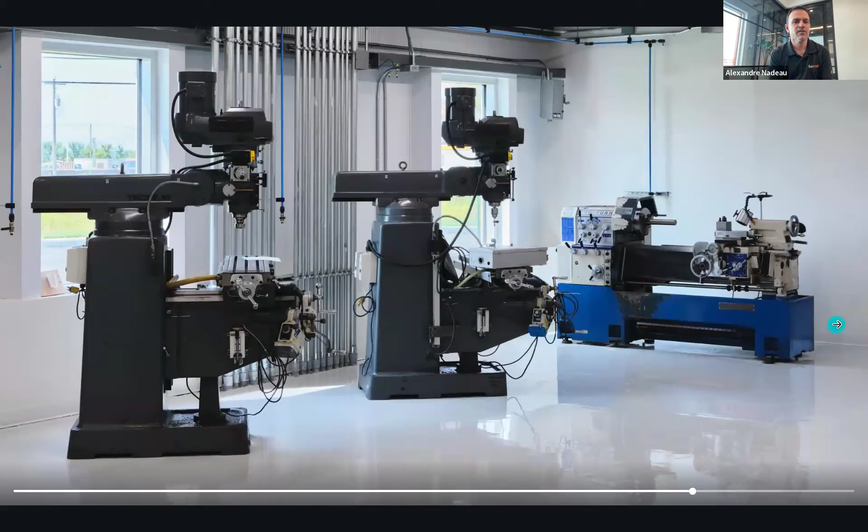So Tecnar is a funny company, guys. We have 4 business units under the single brand. Okay. Why do we have 4 business units? Because my father, who used to be a researcher at NRC, invented a way to weld semi-automatically pipe spool welds, open bevel butt welding for pipes. And that's 89. And we're still world leader in robotic welding of pipe spools.

But as time passed by, we were given opportunities to develop technology for other patents that had in common that they were all being invented at Boucherville's Institute of the NRC. So I think what we have in common is a highly diversified company with NRC Boucherville inventions. This is what we are. Why do we still have 4? Because I think we've really believed in all of them. When I took over management in 2016, we decided to keep them and reinvent them, redesign them, rebrand the company.

And the first 5 years was really establishing products that are industrial, not only meant or tuned for early adopters or innovators, but meant for the industry. So it's not a chronological image set, but we'll start from the left. As you see there, that's the Accuraspray. It's the 4th division. Of course, Luke knows this one very well. He basically pioneered the whole thing in the 90s and was with us for 20 more years.

The Accuraspray now is going to reach its 1,000th sensor in the industry. And now having diagnostics is not a curiosity, it's a must in the thermal spray industry. It is a true repository of the intellectual property that really matters, which is what's out of your gun. People are building their IP with what the Accuraspray measures. We're super proud to have coupled that to the cold spray industry with the CS.

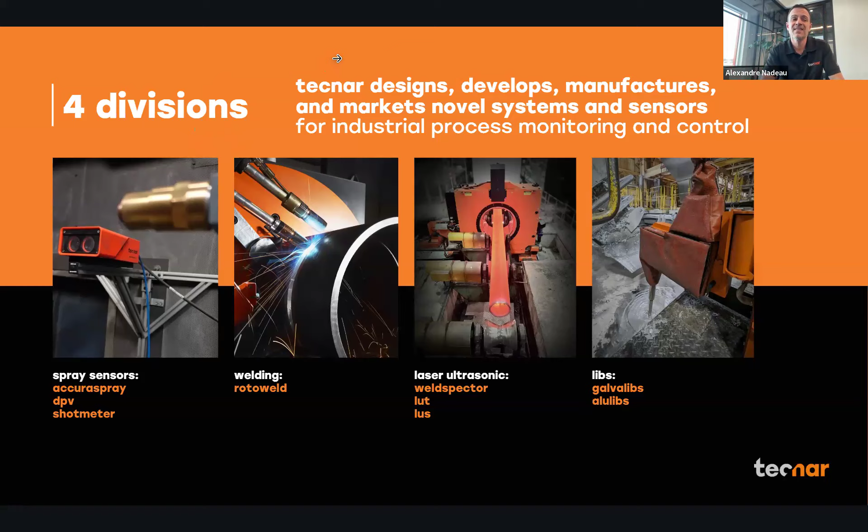Why do we show this one? It's because it's our main repeat business, in which we have a segment and a strategy to become #1, because we're basically more accurate, we're safer, and we're friendlier and more versatile for being installed in many different places of the plants, small diameters, very large diameters. So laser UT is quite an adventure, and there's actually a bright future for laser UT in the inspection of cold spray additive structures, and Luke will talk about that.

Then finally on the right, we also do chemistry by lasers, which is LIBS, laser-induced breakdown spectroscopy. We have not invented that; what NRC invented is a nice little trick that they've patented to apply LIBS to molten metal chemistry monitoring.

We now have about 50 systems in continuous galvanizing lines, and we're currently opening up the market to molten aluminum, namely the secondary market of ingots and casters, where using recycled material is key to be profitable, and having a continuous reading matters much more than just using physical samples every couple hours. So today's future for Tecnar, before I leave, is to use all these data that we've been providing.

Even the RotoWeld has a camera, and we use the data of our systems to replace expertise that's harder and harder to get. The RotoWeld already has that. It welds now all by itself. The Galvalibs on the far right will, by the end of this year, replace the galvanizing engineer by deciding itself what to put next, what ingot category to put next in the bath.

The LUT for seamless pipes is going to decide which plug is good or bad for doing the piercing, for example, and the Accuraspray should, by the end of this year, decide itself what is the right spray parameter based on an AI loop with lab results. So the goal for the future at Tecnar is to build value on our data, and cold spray is definitely a vibrant field in which we're looking to be present too.

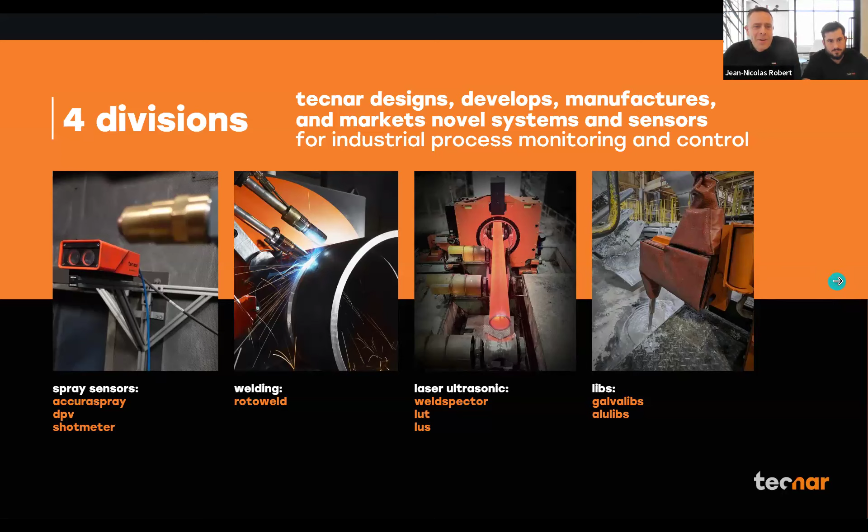Thank you very much. Awesome. Thanks, Alex. Yeah, you're kind of stealing my thunder there, but that's fine. We'll speak about that at the end of this presentation, but thanks. You're the boss after all.

So here's a deep dive. I just wanted to take a minute to, again, dive deeper into our spray sensor divisions. There are some products that you guys on this call already know. Just a couple of updates as far as our products are concerned. The cold spray meter that some of you know about or even use on a daily basis is now being replaced by our DPV with a laser option.

Again, more robust. So we'll still maintain our service with JF's team from a service management standpoint. We'll still maintain service on the cold spray meter, but we're phasing out that product and focusing our efforts on the DPV. And as far as our production units are concerned, yes, we're celebrating our 1,000th Accuraspray in the market, and our lead time on that unit, by the way, is 1 week. We invested a lot in our production lines.

Very proud of that. And the Accuraspray CS, fairly new to the market, but there's a dozen of you on this call right now that are using it, that purchased the unit over the last year or two, going very well. I also wanted to show you the shot meter. It might not be as well known, but the shot meter was previously exclusively distributed by Progressive Surface. And now we also sell it direct. So we're actually going to be participating in a few shot peening trade shows over the year, and start being more aggressive in that industry.

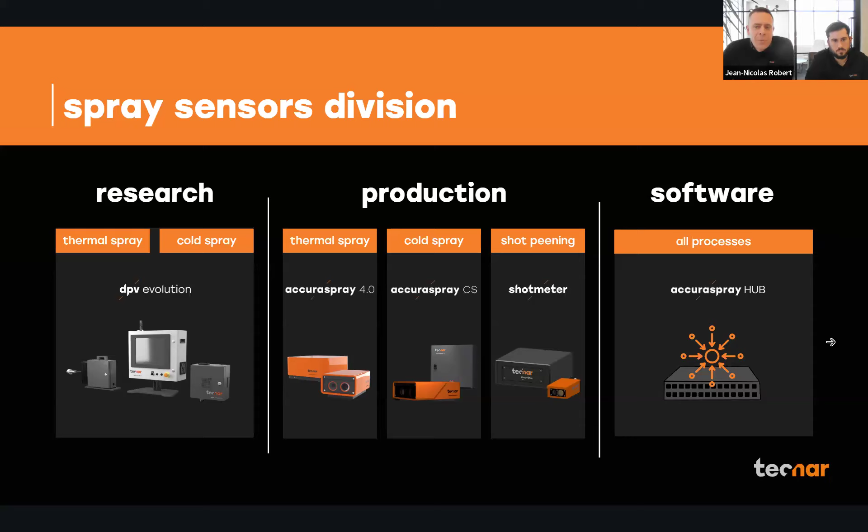And at the end of this call, I will show you a quick slide on our Accuraspray Hub. Officially, we'll be soft launching the product at ITSC in May, just prior to the CSAT session. So maybe I'll be able to tell you a bit more at CSAT.

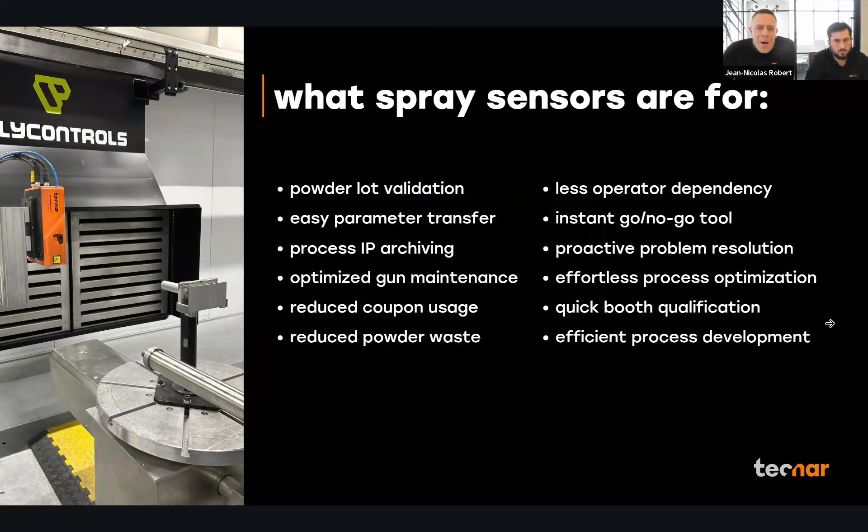And before I pass it over to JF, I just wanted to put there a quick reminder of what sensors are used for. There are many reasons why you need to have a sensor. Our belief, as Alex said, is that every spray booth, thermal or cold or peening in the world should be equipped with a sensor. So I'm going to quote Vic, who we all know well, who told us once that our Accuraspray is the poor man's Doppler, and he's right. We work hard so that it's not that expensive, but we also work pretty hard to make sure that it was also easy to use, reliable, and repeatable. So that's what JF's going to talk to us about, introducing in more granular detail our DPV with the laser option, and then our Accuraspray CS, what they do and how they operate.

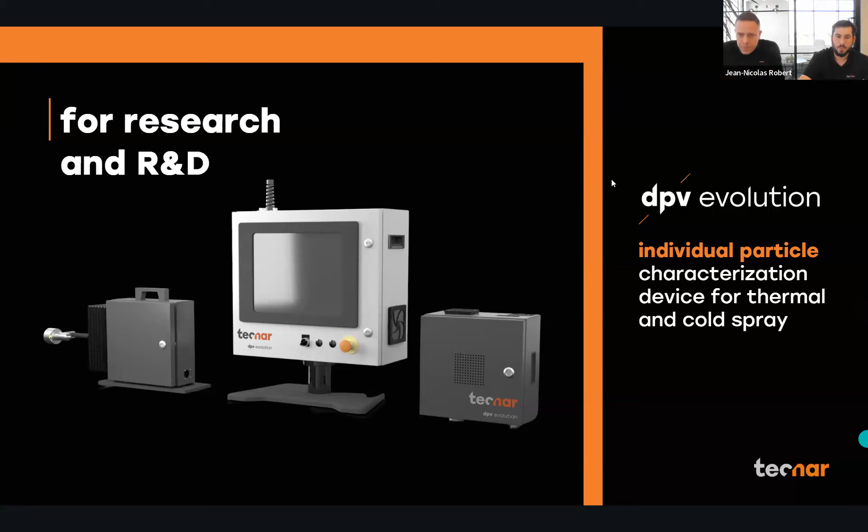Yeah, thank you, JN. So I'm going to be starting with the DPV here. The DPV is a pioneer in the space of in-flight particle monitoring. It was developed conjointly with the NRC. As Alex said, we're very close to them. The DPV can measure temperature, velocity, individual particle size distribution, but it can also come equipped with a laser to allow for cold spray characterization.

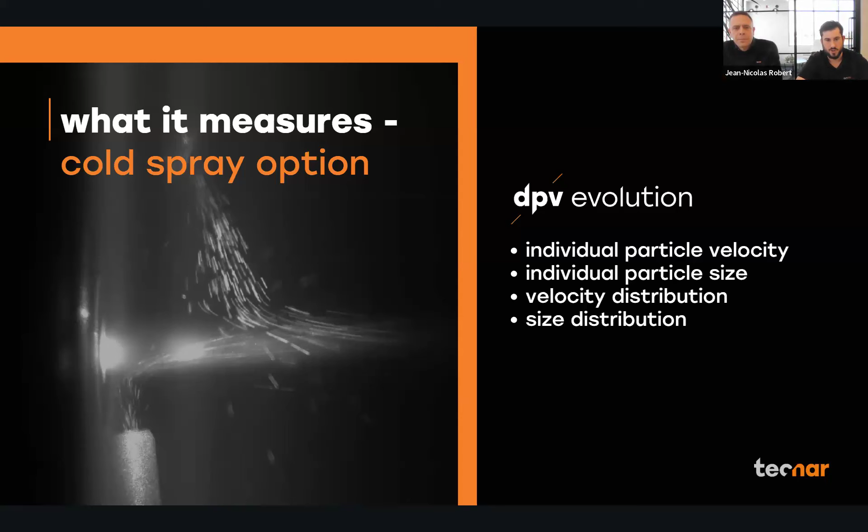So while measuring those different readings, the DPV does the individual particle velocity, individual particle size with the use of what we call the mask technology. And we also developed something that we call the scanning unit, which really allows us to do a cross-sectional analysis of the plume. The goal of the DPV is to be able to grab granular information and in-depth detail of your plume across the entire geometry.

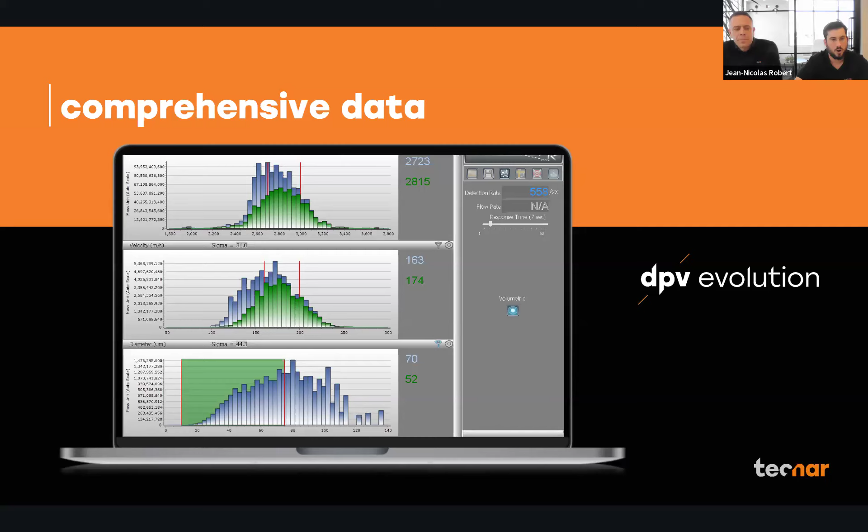So like I said, it's easy to use. The software allows you to separate certain areas of the plume and really do a deep dive. It's been used since early 2000. It's referenced in many articles and scientific papers, many of which are on our website. So I invite you to have a look at that.

Now talking about the CS. The CS is like a mix of all that experience that we gathered throughout the years measuring thermal spray and cold spray with the DPV, but with the ease of use of the Accuraspray, which is now in its fourth generation. So we took that deep knowledge and understanding of the plume, mixed it with that easy to use, easy to integrate, robust, intuitive technology that is the Accuraspray, and we got the Accuraspray CS.

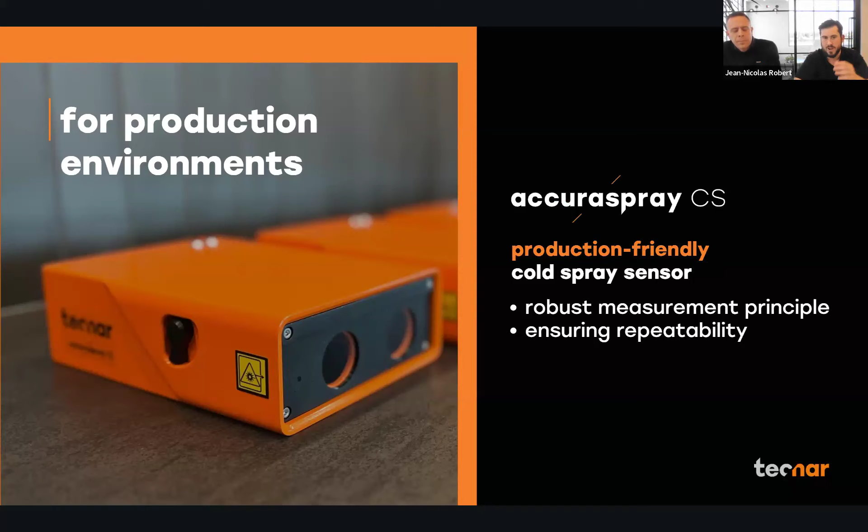The Accuraspray CS works with an optical system. We did many tests, and we believe that an optical system is a lot more robust and reliable than a camera-based technology.

So just a little funny anecdote. Recently, I was talking with a new customer of the Accuraspray CS. He read the quick setup guide, we had a short call, 2 minutes, and he told me, hey, look at that. It works just like magic. Got velocity just by pointing it at the plume. So that's very nice to hear coming from the industry.

So with the Accuraspray, once you get that quick setup guide, just aim it at the plume and you get your velocity. You can do relative feed rate, in-flight particle velocity, substrate temperature.

And finally, at Tecnar, we believe in the strength of software. So we put a lot of effort into software engineering, into gathering the feedback of the industry, of the end user of our technology, and put it as fast and as good as we can within our technology. So we work continuously to put that feedback into our sensors.

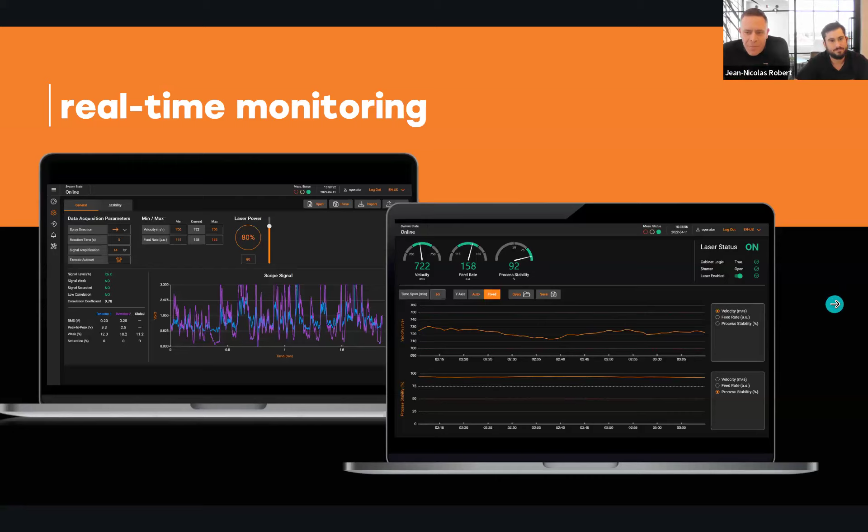Thanks. Awesome. Thank you, sir. And JF is our service manager, by the way. So if you have an issue or anything or positive feedback, JF is your man here at Tecnar. So now's the time, Luc, sending it over to you guys so that you can introduce us to your company and your technology and how you use ours.

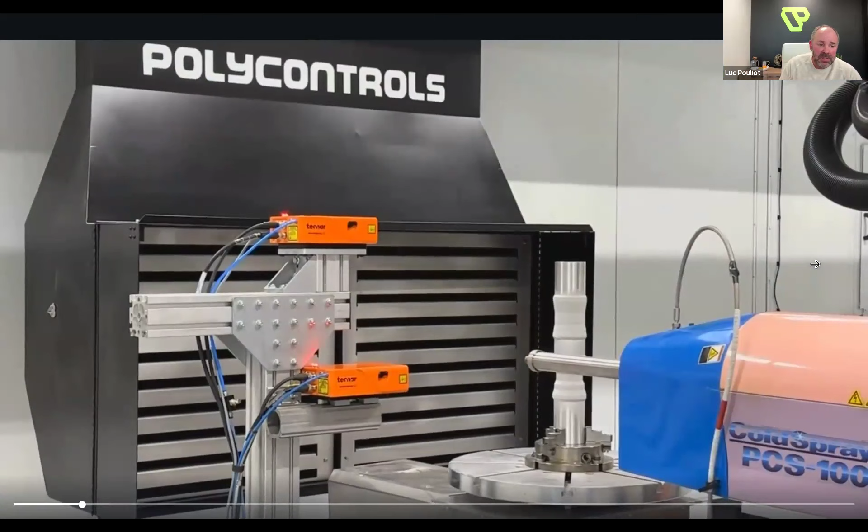Thank you, Jean-Nicolas. So my name is Luc Pouliot. As Alex said, I've been with Tecnar about 23 years, before deciding to become an entrepreneur 6 years ago. This is when I joined Polycontrols. And the objective today, apart from introducing the company a little bit, is to show you how those nice and reliable sensors can be not only integrated smoothly in an industrial platform, but also trusted.

So what we're seeing here, not much is moving at the moment. It's basically a setup that will allow us to directly compare two identical sensor heads manufactured and calibrated by Tecnar, in the same booth, the same day, with the same gun, the same operator, without even stopping the cold spray gun in between the two measurements.

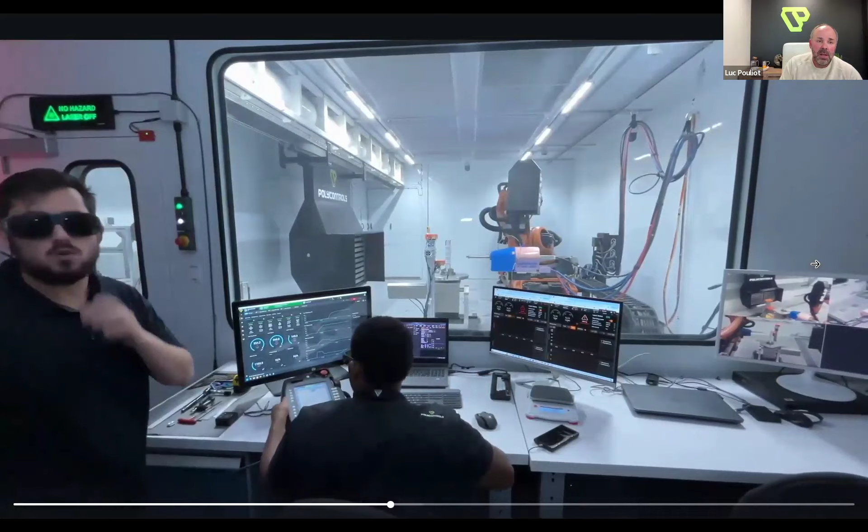Allow me to insist, for any type of diagnostic tool that you might want to use, on the importance of the setup. So defining or designing a way to ensure reproducible placement. This is absolutely critical so that you can compare apples to apples over time.

What you're looking at now is basically our Smart CSAM 5.0, Industry 5.0 platform. So starting the gun, tuning parameters, upstream parameters, until a point where all the dials will be in the green, and the powder feeder will be told to start spraying.

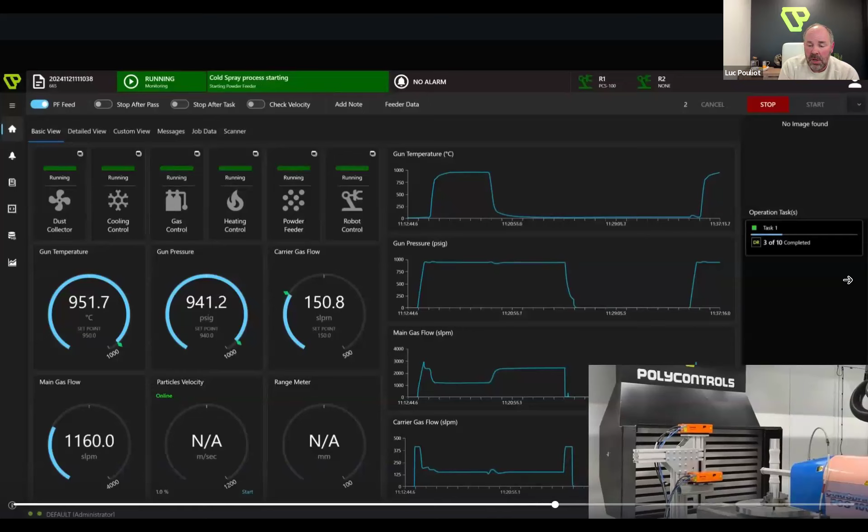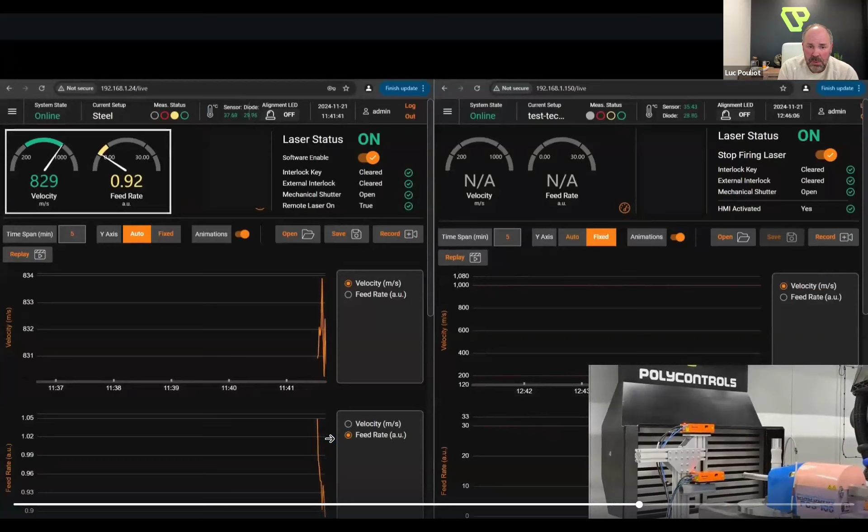So what you're going to witness first is the gun moving towards the bottom sensor head. This will happen pretty soon, actually. I think this is now. And so on the left-hand side, you see the Tecnar interface, smoothly integrated; a velocity of 830 or so meters per second is detected very rapidly.

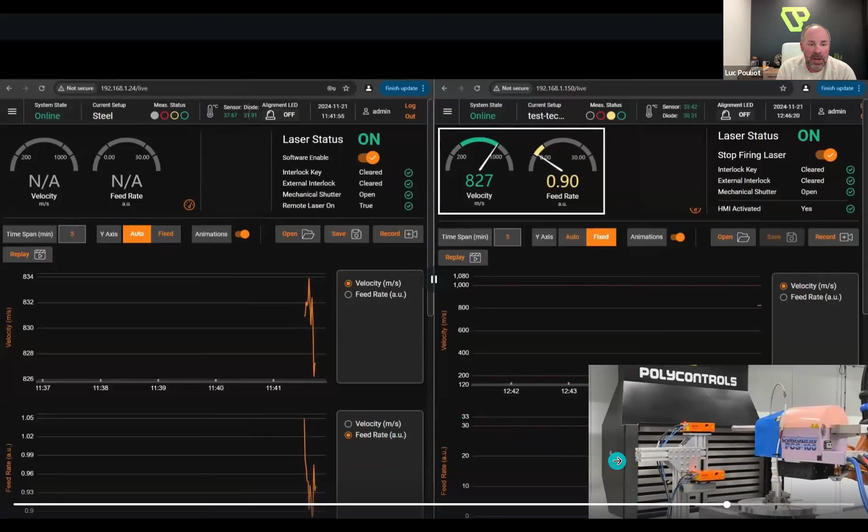Now the gun is asked to move at the same standoff to the second. This is a close-up towards the second sensor head. We're going to switch to the right-hand side of the screen, where we can confirm easily that the velocity is 825, 827, so well within the precision of that kind of measurement.

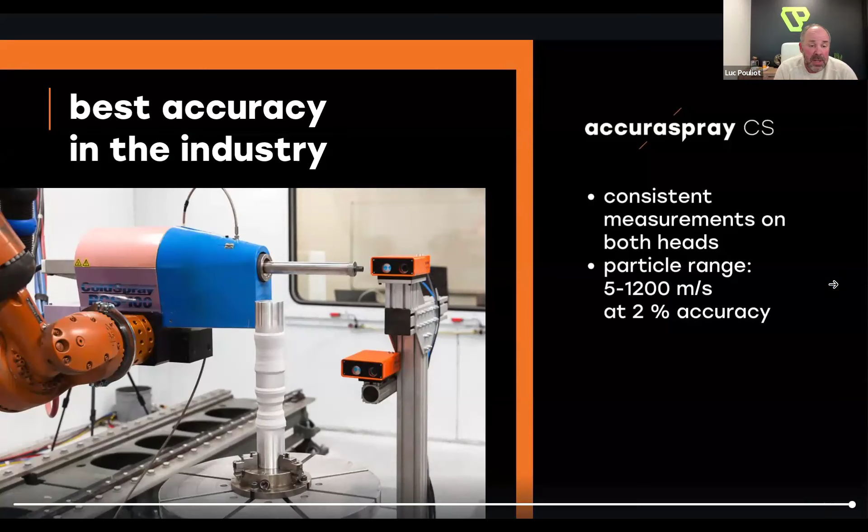So we have done that several times for several sensor heads, and we're happy to confirm that those sensor heads are direct replacements, meaning that if one is sent for calibration and you have another one, you can just replace it temporarily, or if you buy a second, third, or fourth one because you have more spray booths or you want to monitor from different angles, they will yield the same results regardless of the serial number.

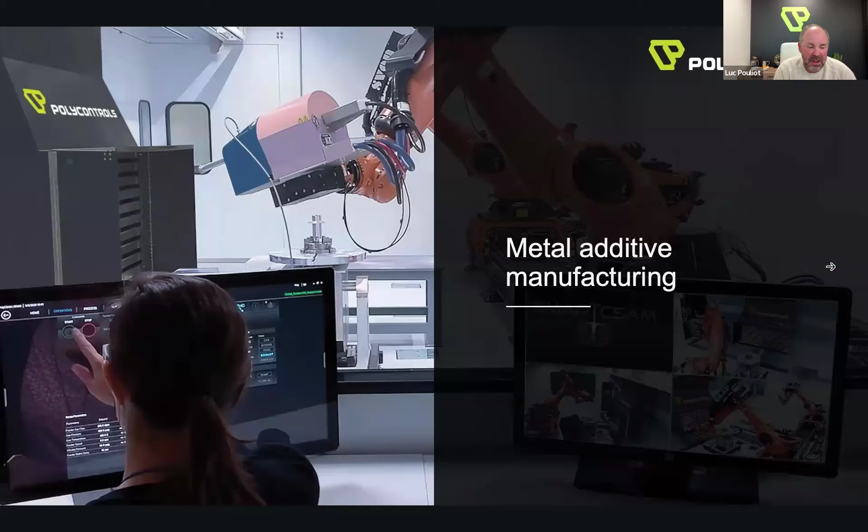Next slide, please. So at Polycontrols, maybe some of you attended North American Cold Spray last September. We have this pretty large cold spray or CSAM facility that you partially see on screen. So metal additive manufacturing in general is definitely a core focus and a core business. Next slide, please. The company is more than 40 years in business, about 40 employees.

What you see on screen is our mission, and I want to emphasize the fact that we strongly believe in sustainability, and it comes into play even when we select processes we want to work with. So there are reasons why we select some and reject others, not only for the performance, but also for their compatibility with circular economy, with the sustainability aspect of the process and the way we operate.

Next slide, please. So the company has 3 business units. On the left-hand side, it's about instrumentation. So we have a service calibration lab. We calibrate mass flow meters for liquid and gas, all types of them, thermal mass, Coriolis, and others. About 2,000 a year, up to the highest standards of the industry within ISO 17025 standards.

Not only do we calibrate those, but we also have the expertise to integrate those types of devices to create gas conditioning systems. What I mean by that is gas mixers, pressurizing units, gas separators. So whatever custom fluid management system you might need, it's part of our expertise. On the right-hand side is what you're mostly interested in if you attend this webinar. It's metal additive manufacturing using the CSAM process.

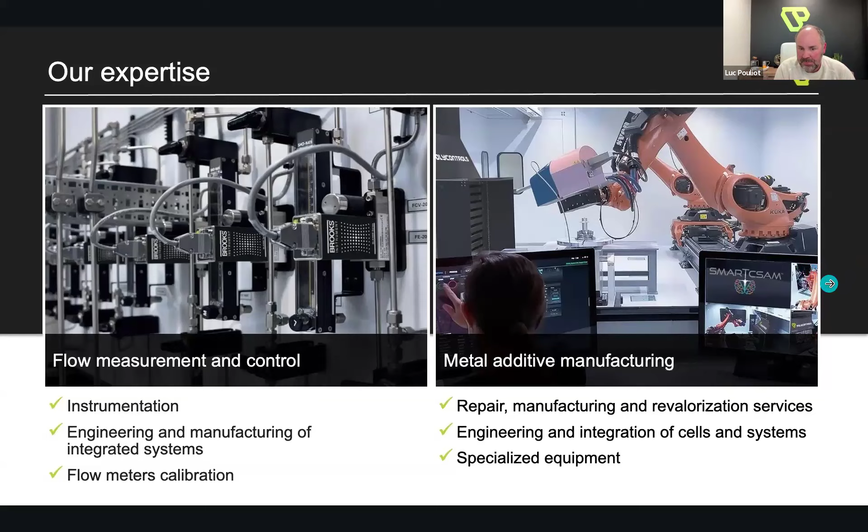And here we have 2 main types of activities. Spray services, so developing the application, the solution, and actually spraying parts for those customers who do not have enough volume to justify CapEx for a spray room, or for those who have that volume and CapEx available, we design turnkey thermal and cold spray cells.

Next slide, please. In terms of accreditation, you have them on screen. I'm not going to read all of them. Obviously, for aerospace, 9100 is critical. And for most of what we do with aerospace, bio, pharmaceutical industry, and even militaries, the controlled goods certification is mandatory. Next slide.

So you won't be surprised if I say that cold spray is a kinetic energy based process. Therefore, being able to measure, control and adjust the spray particle velocity is critical. That is why we use and strongly believe in those sensors. I will hand over, no, please come back. I will hand over to Fernanda to give a testimonial about her daily use.

Yeah, hi everyone. My name is Fernanda Caio, and I'm lucky enough to work every day in this nice facility that you've been seeing in the videos and in the photos. So here, what we do every day is cold spray, and I would say we couldn't do that without using the sensors and measuring the velocity every time. So we pretty much use the Accuraspray CS for every spray run, before and after spray, just as a sanity check to verify that everything is going okay, and it's a very quick and easy response. If something is not quite right, we will know right away by checking the velocity.

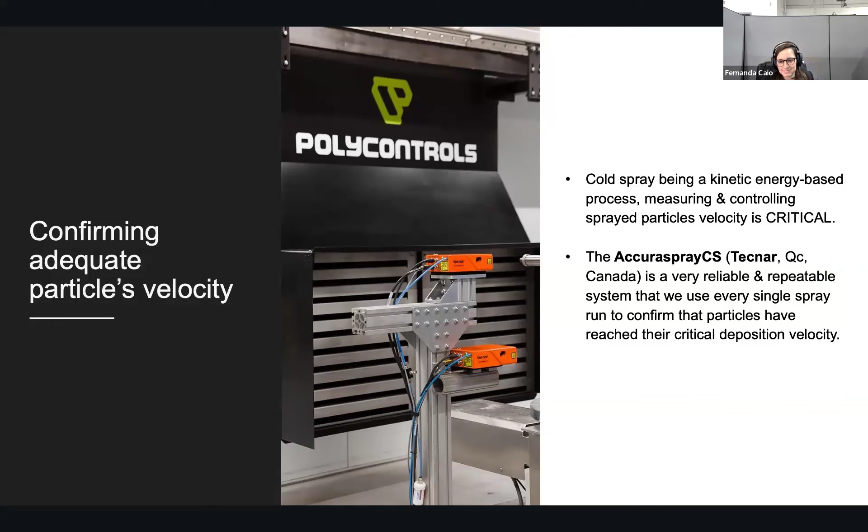And when we put it back, we checked, and it was just like nothing happened. It kept measuring the same velocities and working just as before. So we just needed to replace the screws and the plate that we broke, and we kept going. We sent it back afterwards for calibration to make sure nothing was broken inside, and it was all good. So I can say from my experience that it's a very repeatable, reliable, and robust sensor for velocity.

Can go for next slide. I think Luc is back.

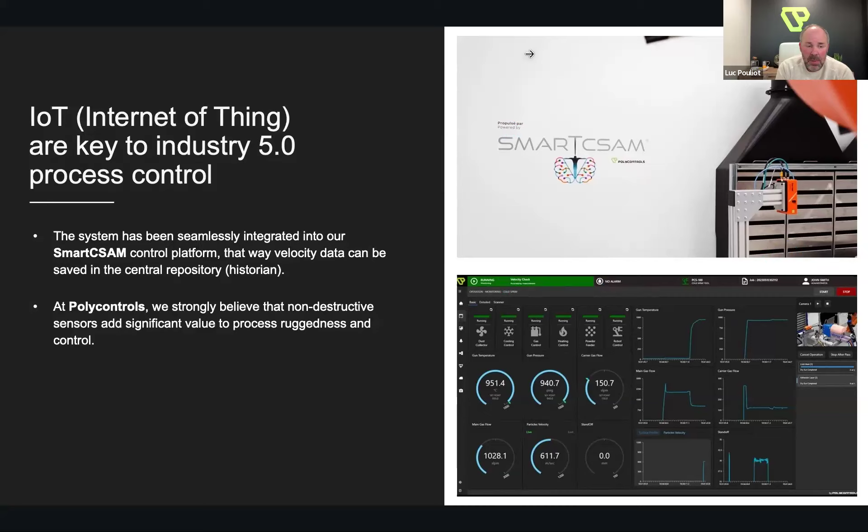So beyond, of course, the Accuraspray CS, we at Polycontrols are strong believers that sensors of various sorts, especially non-contact, non-destructive sensors, are really part of the solution for not only robust process control, but a more clever and efficient use of material. There's nothing worse than spraying too much powder and wasting some more in the exhaust system, or even worse, having to strip off or remove too much material.

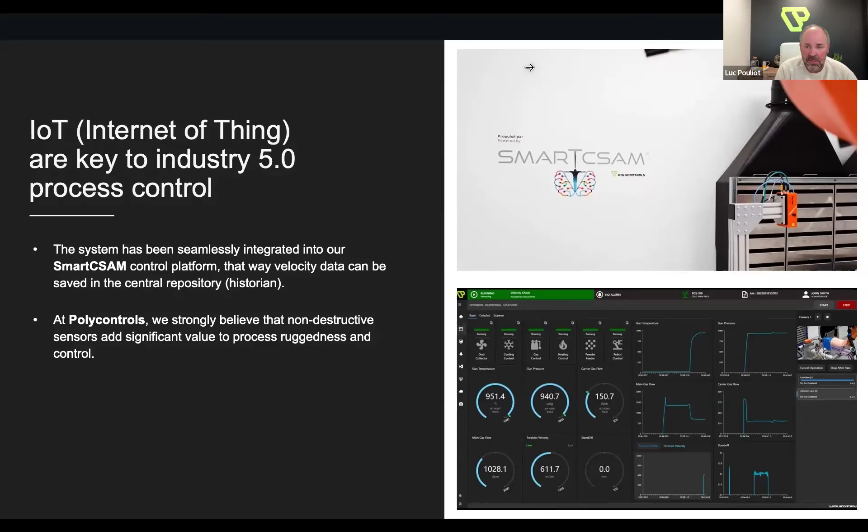So a lot in our Smart CSAM operating platform is related to various types of sensors, and this is what we're going to discuss in the next couple slides. So one technology we're currently integrating is based on laser ultrasonics. I won't give you a course about laser ultrasonics, we could be here for a long time, but the fundamentals are very similar to conventional ultrasounds.

This means we need to generate a sound wave. The big difference is what kind of hammer you use. In the case of conventional ultrasonics, you're going to use a mechanical transducer and sometimes some coupling media, and you're actually going to touch the part. Here, the idea is to find a way to obtain similar information without touching the part. That way you are quite independent from part temperature, part movement, or even part geometry.

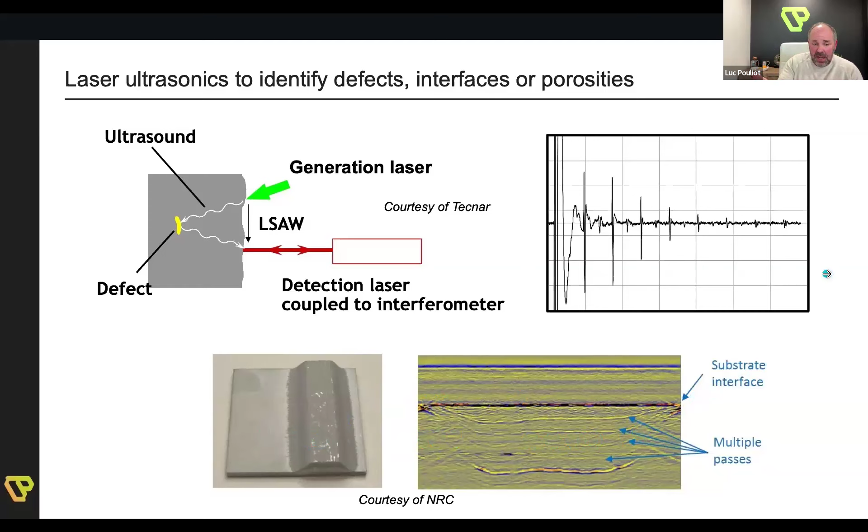That's a very long story made short, but let's get practical and look at the bottom picture. This is a cold spray buildup. If you use that kind of technique on a cold spray sample like that, you can even resolve those miniature interfaces that correspond to the multiple passes that you're depositing over time by going back and forth with the gun in front of the test plate. You can see those interfaces as defects, if you will, or disruptions that the sound wave will be sensitive to.

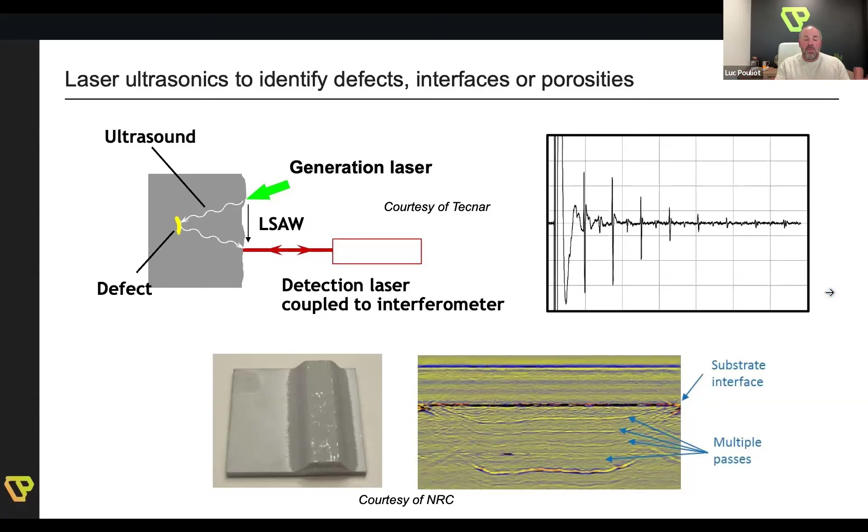To conclude on that technique, it can do much better in terms of resolution. Theoretically, it can sense a difference on the order of one interatomic distance, but that would be overkill anyway for cold spray. So we're integrating that as we speak in the Smart CSAM platform.

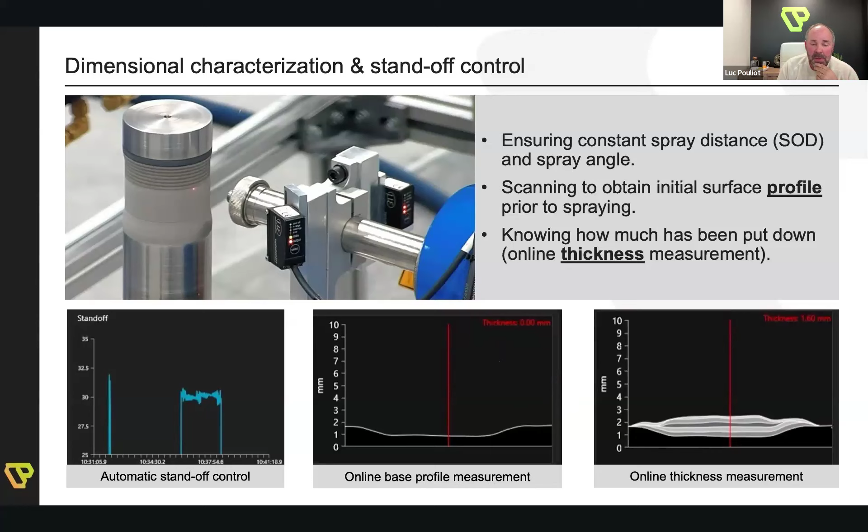Another very important aspect, and again it won't be new to you, is the control of standoff. Standoff distance is a critical parameter. So another thing we implemented is an automatic standoff control based on the interface between the robot and the sensor, to keep standoff the same comfortably within half a millimeter precision.

Next slide, please. And last slide, actually.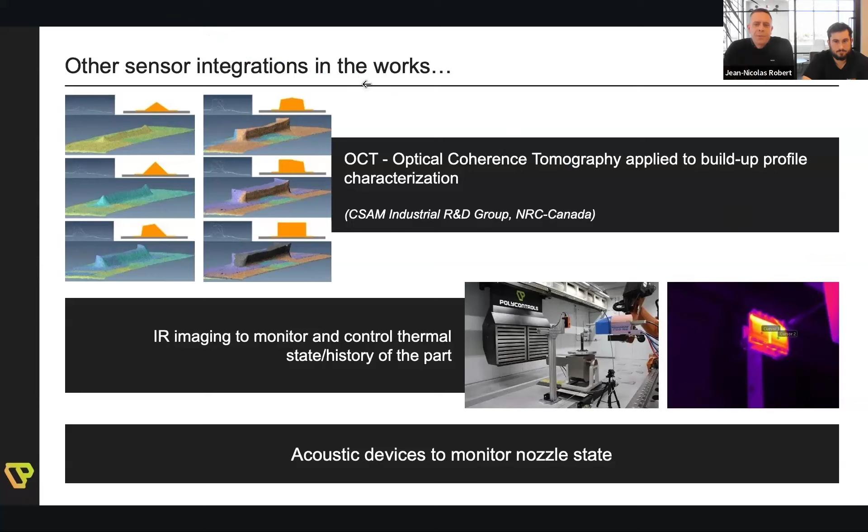Awesome. Look, we gave you 15 minutes thinking you were going to take 30. So this is great. We're going to have more time for questions. Actually, Aaron, I got 3 questions already. I can answer them. I think we got them through the different forums when people were signing up. I don't know who they're from, though, but I'll answer them.

So there was one question about particle size and what technology does what. Well, I think we pretty much answered this question in our presentation. There's one thing I want to point out, though: even though we split research and production, we see more and more academic clients and research centers that will go to our Accuraspray series instead of our more granular and precise, I would say, DPV technology.

And the reason why is, well, there's budget first and foremost, but there's also the potential of then exporting those R&D projects into the industry world. So we see that more and more, because those Accurasprays and those shot meters are the ones that will be used in production environments. So we see more and more academic clients going to the production tools first.

The second question I had was about AI and if we're interested in getting some AI partners. The answer is always yes. You know how to find us. We'll leave our coordinates at the end of this presentation, but for sure, as Alex was saying earlier, Tecnar is slowly but surely moving into almost a software company. We've got a team of software engineers and data scientists here in the office. And any help or any joint venture that you guys want to propose our way, we'll always be listening.

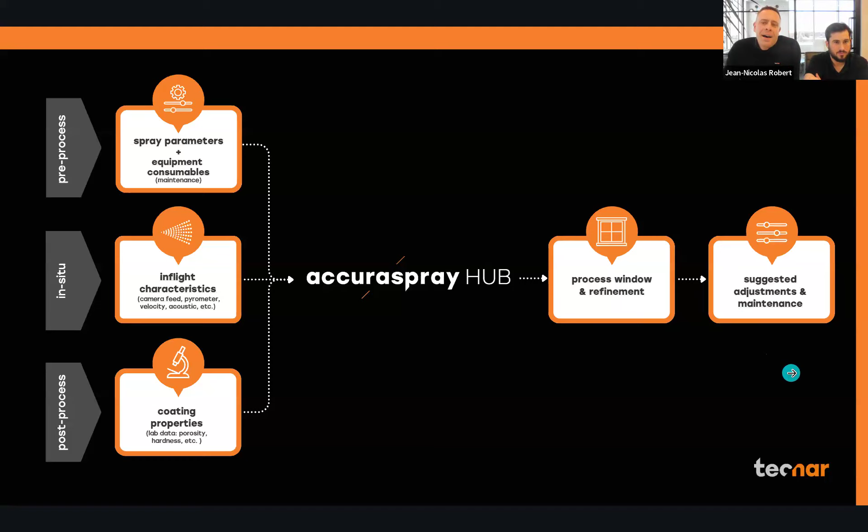And ultimately, maybe it isn't a utopia, but we're working on it. The ultimate goal, as Alex was saying, would be suggesting adjustments and maybe one day doing automated adjustments. So the hub really allows us to come up with all different ranges of analysis based on lab results that at the end we correlate with different things. So I can't wait. That's the only 2 slides I can show for now, but there's a lot going on.

It's very exciting. We're lucky here in Montreal that we've got this aerospace ecosystem. Fun fact, we're one of the 3 cities in the world where we can build an entire aircraft from top to bottom, with Seattle and Toulouse. So Montreal is there somewhere on that map, and we're lucky to be in the middle of it. So we've got great partners, and we can for sure develop all those products for the industry.